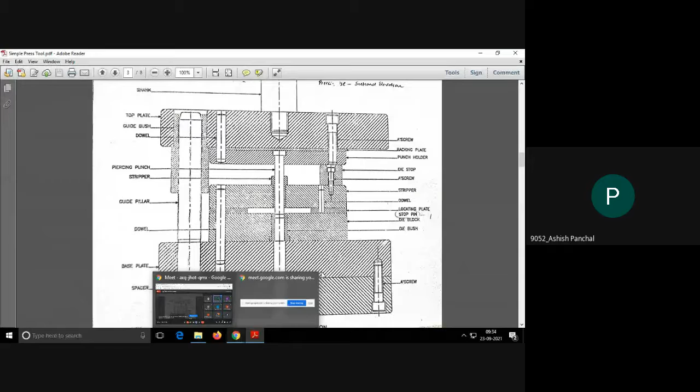And for any guide pillar and guide bush, for die block, what should be the thickness? Die block you take 25 mm thickness.

Stripper you take 15 mm. Punch holder you can take 15 mm. This is just a rough guideline, okay? It's not hard and fast. And for the punch backing plate, 5 mm.

Then coming to the bushes, how to design the bushes? You have to take minimum 3 mm and maximum 5 mm, not more than 5 mm, not less than 3 mm. Because if the thickness of this bush is less than 3 mm, then it can collapse while fitting as well as during working. So minimum 3 mm wall thickness has to be there.

So for example, if piercing punch diameter is 10, then the diameter of the guide bush will be 16 minimum and maximum 20. Similarly, collar also you can take 3 mm to 5 mm. So if this is 10, this diameter maximum will be 20 and this diameter maximum will be 30.

Then collar height thickness, you can have your own judgment, you can take 5 mm. Here the collar height, this bush height should be at least 25 to 30 mm, because here it is going to be guided over a long distance. So you can take this as 30 mm.

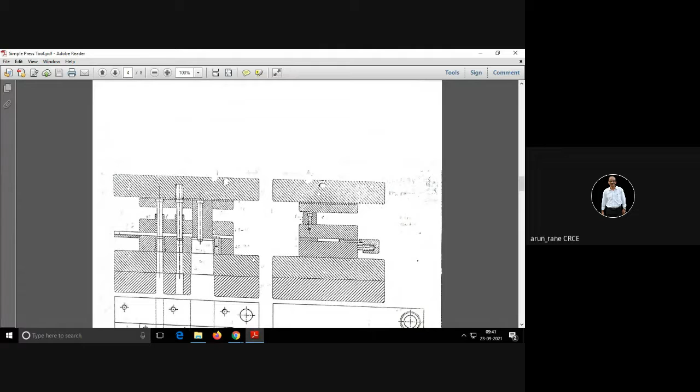Then another consideration here is this die stopper. This is what we call a die stopper. This is used just to prevent the falling of the upper half. Suppose if it comes out from the shank, if it falls down and this die stop is not there, then the punch holder will go and hit here and your punch holder plate will get damaged. That's why we provide a die stop.

Now look, die stop is fixed to the stripper plate. See the bolting, this die stop is fixed to the stripper plate. Die stops are round, circular. See here, these are the die stops, the two shown here.

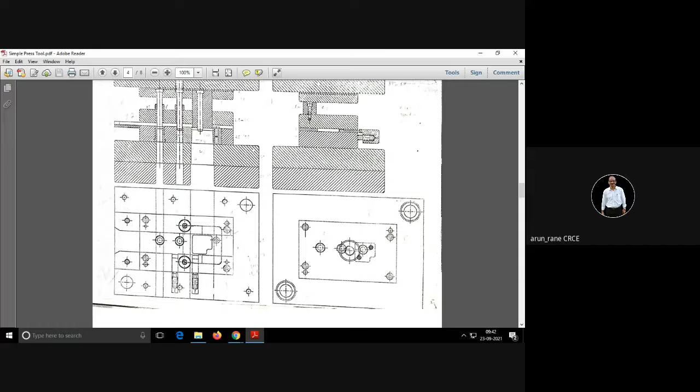So preferably the die stop should be at the center of the die, somewhere here, not over here, not at the end. So it should be preferably at the center or somewhere closer to the center. So look here, the die stop is fixed to the stripper plate. In case the upper half falls down, it will go and touch the die stop, so the damage will not happen.

For the die stop size, you can go for a round die stop, 25 dia. This die stop's diameter you can take as 25mm, and the height of the die stop can also be taken as 20mm. So that's the die stop. So I have told you die stop, shank, top plate, guide pillar, guide bush, dowel, everything - these are the basic parts.

Now either you can use a spacer, that is a parallel block here, or you can use a plate of the base plate size, with thickness 25mm. If you are using a spacer, then you need to use two spacers. Why are spacers used? Just to save on material. Suppose if this is 300 by 250, then the spacer need not go for 300, you can use a spacer of say 100mm by 250, two numbers.

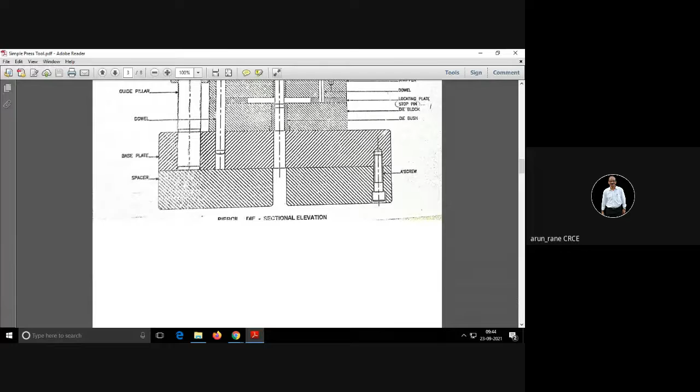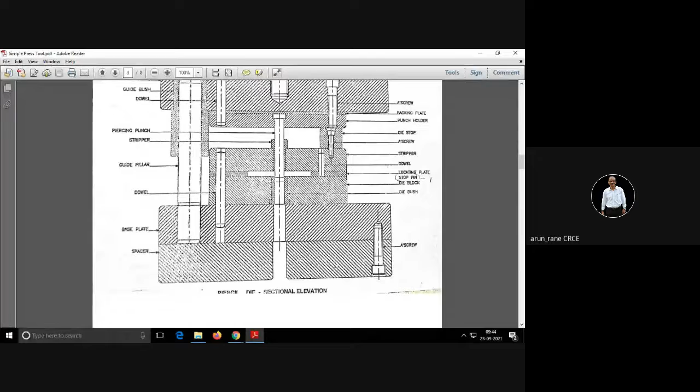But if you are using a single plate, then alignment issues will not occur. What happens with a spacer? If suppose the thickness of the spacer is not the same, even a slight difference of 0.1, then your whole tool will become crooked. Suppose the thickness of the two spacers or parallel blocks differs by 0.1, then the entire tool will become cross.

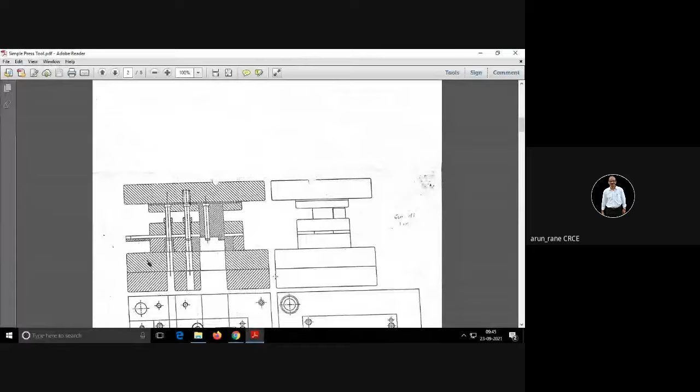So it is better that you go for a single plate. So before you proceed, you check this, study this tool, and then you can proceed. You will need some 1 or 2 iterations, you cannot directly draw it on the sheet.

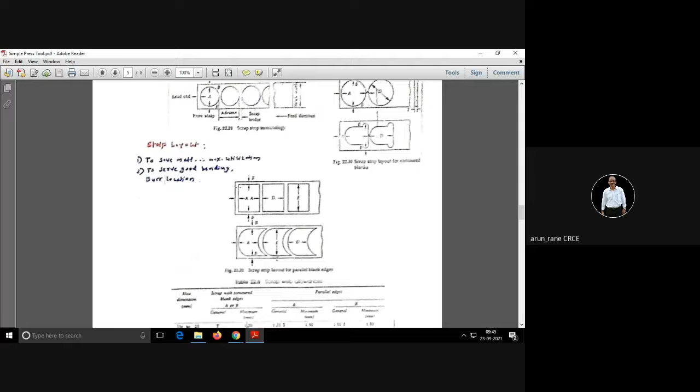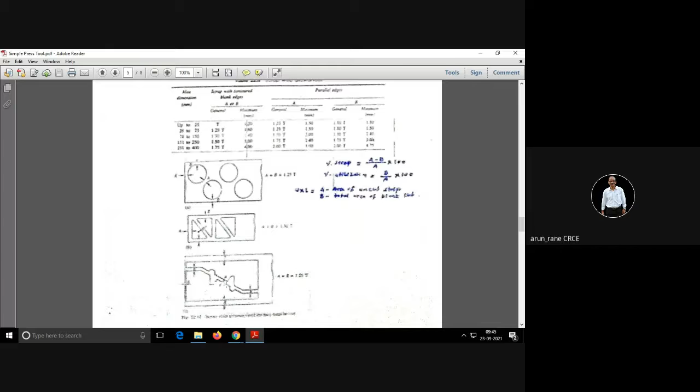Then other things I have covered, so this will help you for the strip layout, how to do the strip layout. This is again one of the components, this is for the circle. Yesterday Joel was telling that in case of a circle, the percentage utilization will be less. But if you have a layout like this, then probably your percentage utilization can be increased, improved. This is what I was telling. Now here, what is happening here?

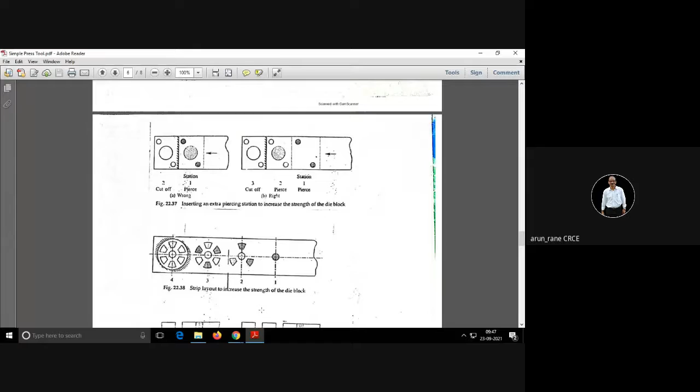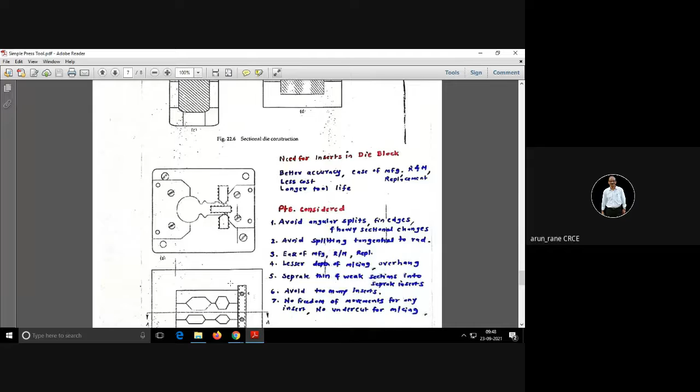Similarly, this is again a strip layout for making a circlip. And this is the concept that instead of going for a single piece, single plate, you try to go for the inserts. Try to go for the inserts. Like I told you, for the punch which is working, you use the bushes. Don't directly pass the punch in the plates itself, in the die block. So in the die block, you fix up a bush, and in that bush the punch will go up and down. Similarly, that punch is also going to be fixed in the punch holder plate with the help of a bush. So try to use the bushes or the inserts wherever there is relative movement.

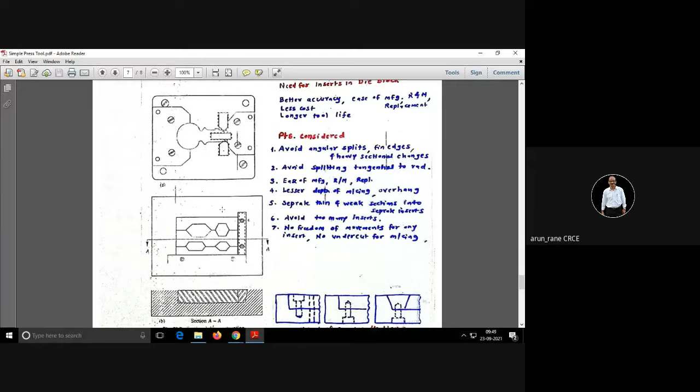So now this was a key. So now the inserts will also help you from the machining point of view. It will be easier to machine. These are the ways to fix the inserts, and these are the standard die sets.

So this also I have explained to you, and these are the stops. These are the stops because you have to initially locate the strip. The strip has to stop at some point, so for that you are using these end stops.

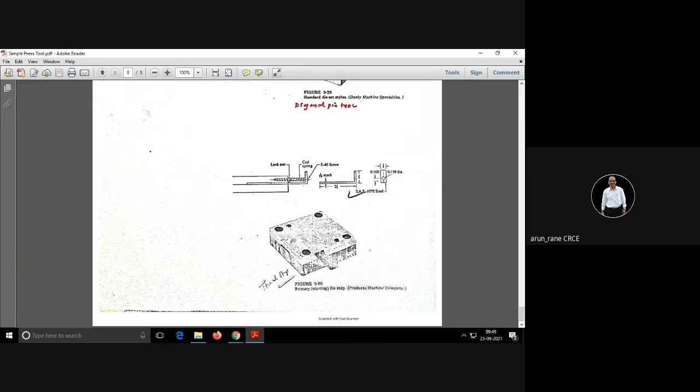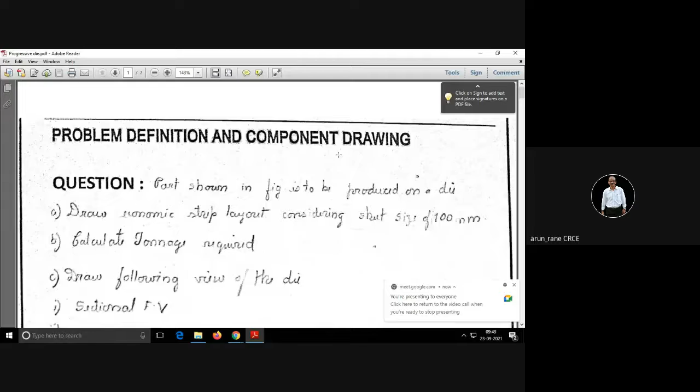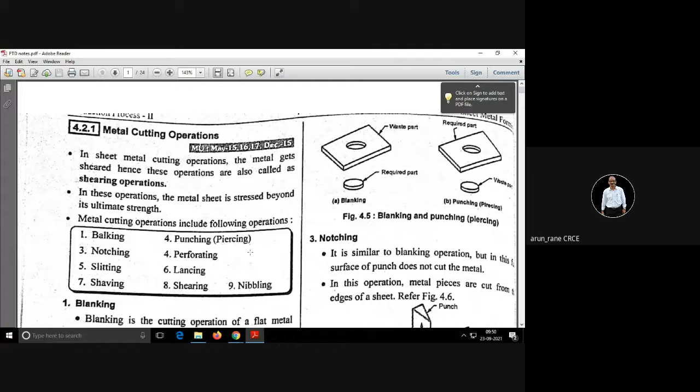So this is also done. Now I had skipped some part, and to keep you engaged, since we had almost done with the process estimations, process time estimation, I had started with the progressive die design. I feel I have taught you enough so that you can start with your progressive die, and definitely in the practical we'll be discussing. So I had missed some parts, like what are the different operations. Before we go for bending and before we go for drawing, I would like to touch upon some important points.

Can anybody tell me what is the difference between slitting and lancing?

Slitting, this is I am telling you from my teaching experience, not from the notes. So if you want, you can write it or refer to the recorded lecture. Slitting is nothing but cutting, and in that the scrap will be generated. So you can write: in slitting, scrap is generated.

Whereas in lancing, on the other side, scrap is not generated. So this is what your slitting is, and this is your lancing. So in lancing, there is a cutting operation from three sides and a bending operation from one side, whereas in slitting there is a cutting operation from all the sides.

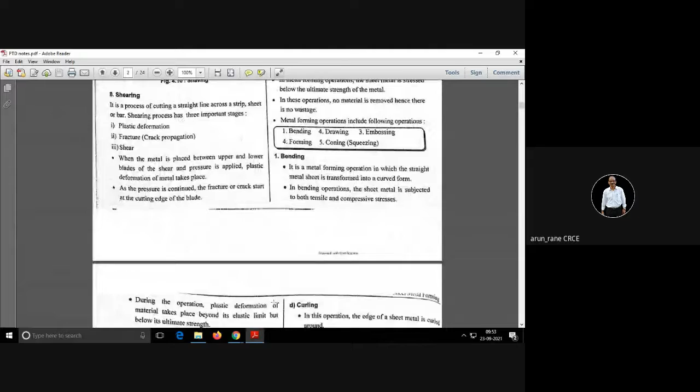Then coining and embossing. So coining and embossing, these are actually not cutting operations. Coining and embossing, they are forming operations. Let me see, I have the sketches. So this is a sketch of embossing, and this is the sketch of coining.

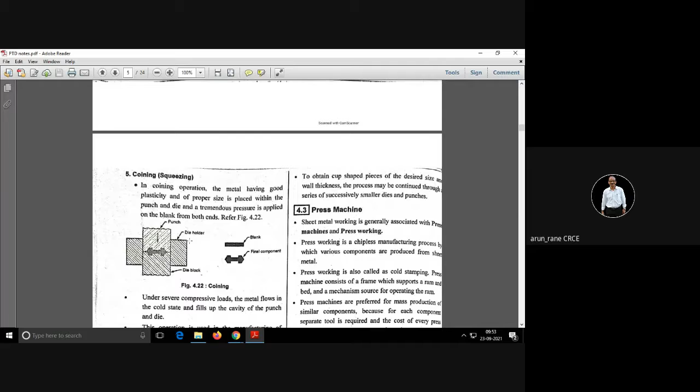So what happens? In coining, you can have two different designs on both sides of the workpiece. It is like casting or molding, whereas in embossing you cannot. In embossing, we press the material down, and the material bulges out on one side. Whereas in coining, you can have two different designs like head and tail. So in coining there will be two different designs, and in embossing there will be only one design.

Because in embossing, one side is depressed and the other side is raised, like your belt, waist belt. Whereas in coining, the different design is created on both the sides.

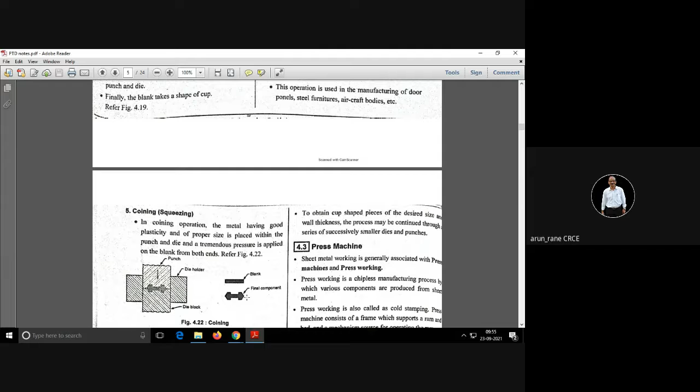In coining there will be a change in the thickness of the strip, whereas in embossing there will not be a change in the thickness of the strip.

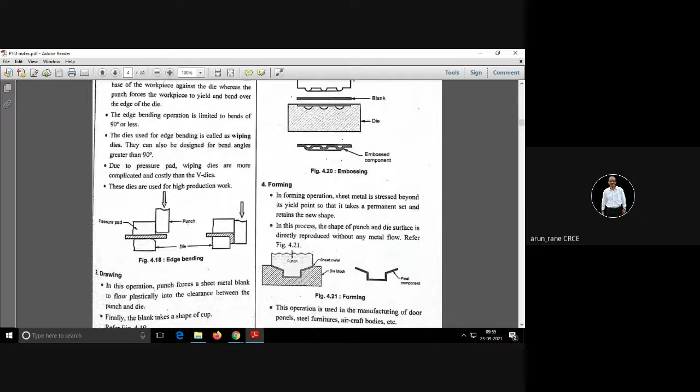If your strip is 2mm, it stays 2mm in embossing, only it bulges. Whereas in coining, you will get a variation in the thickness - the blank's thickness and the final component's thickness will be different.

I hope you are understanding. If not, please stop me. I am only giving you 2 or 3 points out of my teaching experience. Blanking and punching - this difference is most commonly asked.

So in blanking, the punched out piece is useful and the remaining is scrap. In punching, the punched out piece is scrap and the remaining is useful.

Then in blanking, the clearance is provided on the punch and the cavity is of the size of the blank. If I want a blank diameter of 25, then my die block's cavity will be 25, and the punch will be undersize, say 24.8, depending upon the clearance.

And it's the opposite in case of punching - the punch is of the same size as the hole to be pierced, and in blanking, the cavity is of the same size as the component diameter.

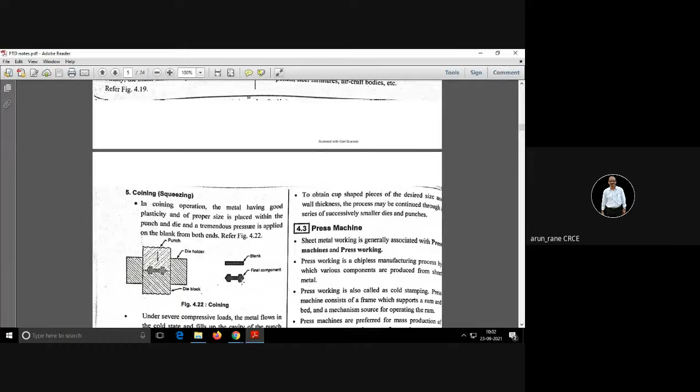Then bending and drawing we'll see later. Okay, now we'll quickly flip through this - these notes I have already uploaded.

Because with the help of this, you will be able to write for the examination. So this is blanking.

Kya ho raha hai? Neeche ka part jo falling down hai due to gravity, that is what we are going to use. So that is what is blanking.

Punching - this is the part which is going to be used, and ye jo hai this is the scrap. In blanking, this is the scrap, top one, bottom one is used.

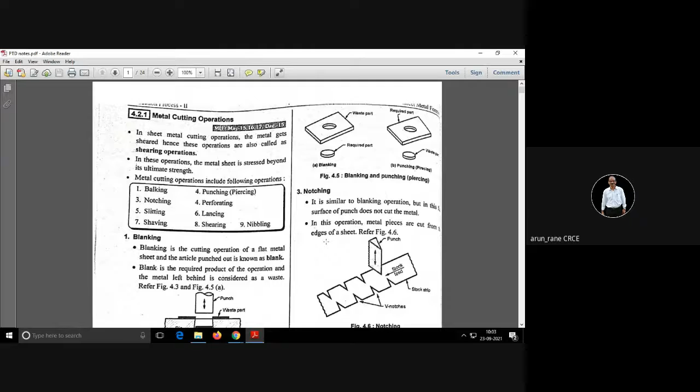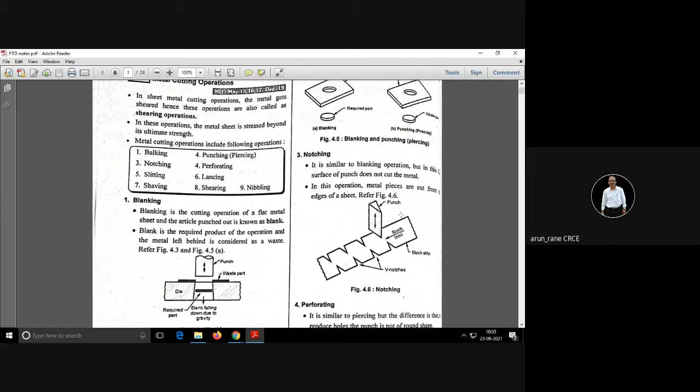Notching is also like a piercing, but usually notching is always at the edges. So we call it a notch, we don't call it a piercing. It is always at the edges.

This is perforating. It can be square holes or round holes, number of holes. Not necessarily that it's square or round, it can be triangular, but small triangles which are pierced. That is what is called perforating.

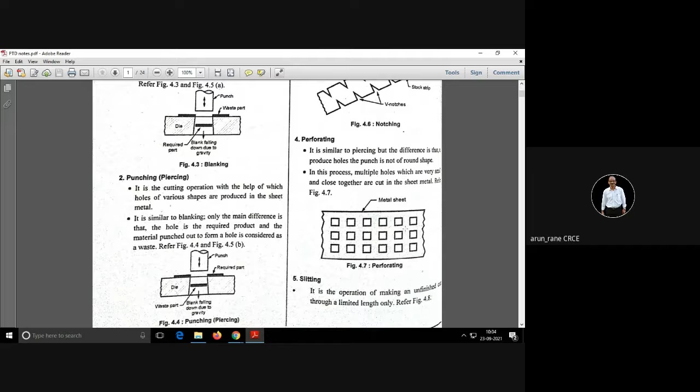Slitting, as I told you, you will get a cut here, and lancing, there will not be any scrap. Teen side se cutting hoga aur ek side se bend hoga. So you can notice in this sketch that this clearance is more.

This is the die block in which this we call as a cavity, and this is a punch which is descending down. So now this clearance you can note that it is equal to the thickness of the component.

Then shaving and trimming is the same. So in shaving and trimming, very small amount of material is removed.

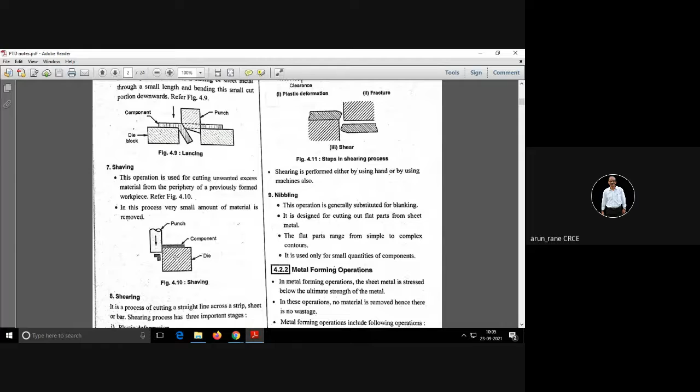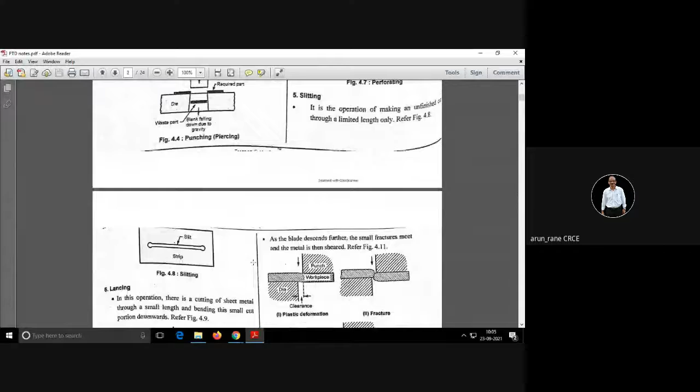Shearing is nothing but cutting basically. And as I told how the shearing operation takes place, you have a punch. Remember here the clearance is not more, it looks like it is more, but it is zoomed up just to show how the shear or how the cutting happens. Okay, so the cutting happens.

First is plastic deformation. Workpiece is plastically deformed. Then the fracture starts from the punch part and from the die part, and the fracture meets, and then only this piece will fall down. If this fracture doesn't meet, like suppose yaha pe aapka 30 degree hai aur yaha pe aapka 45 degree hai, if these are not meeting, then cutting will not happen, shear will not happen.

It is like if you are drilling from both sides like a tunnel, and if they are out, then it will not meet. Or if you are doing a long drilling, say aapko 1000 mm drill karna hai, so 500 mm from side A and 500 mm from the other side. If they are not matching properly, you will not get a 1 meter ka hole. So same thing here, both the angles should be correct.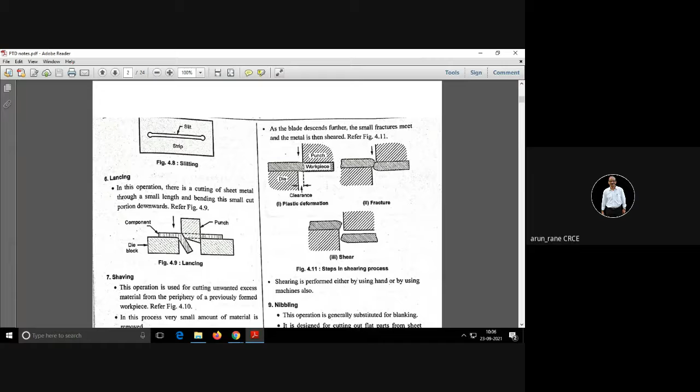Nibbling means what? Like suppose if I want to do a punching of a bigger hole, say I want to do a punching of 200 dia. My piercing hole size is 200 dia. So in that case, I need to have a punch of diameter 200. So what we do in order to save on the material cost and manufacturing cost, we use a smaller punch, 10 dia.

And then we will do the punching across the hole. So we'll take a series of strokes - tap, tap, tap, tap, tap. That is what is called nibbling across the hole. So we are going to use a small punch which is readily available.

So the disadvantage of this is what? It is going to take a longer time. And advantage kya? You don't have to go for a diameter 200 punch. And it's not necessary that you can only do round holes, you can even do square also. Only that it will take a lot of time.

That is one. And second thing is, this nibbling has to be performed on a CNC punch press, where there is a provision of moving axis X and Y. Remember, nibbling is like your milling machine, only in milling machine the end mill is rotating, X and Y axis are moving. In nibbling, the punch is moving up and down, it's not rotating, and there is a movement for X and Y axis.

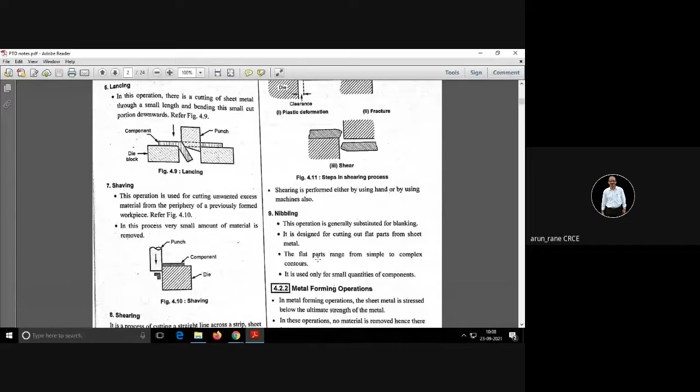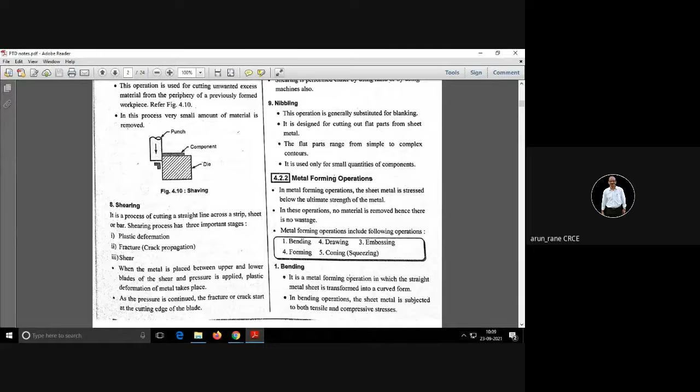And now what about forming operation? Here the cutting doesn't happen. So remember, in forming, the clearance will be more. So what are the various forming operations? Bending, drawing, embossing, forming itself - forming is a type of forming operation. Coining.

So in case of cutting, jo sheet metal hai or the strip hai, it is stressed above the ultimate strength of the material. Whereas in metal forming, the sheet metal is stressed below the ultimate strength, and there is no cutting, there is no material removal. In metal forming, remember, bending, drawing - metal is not removed, material is not removed. So there is no wastage.

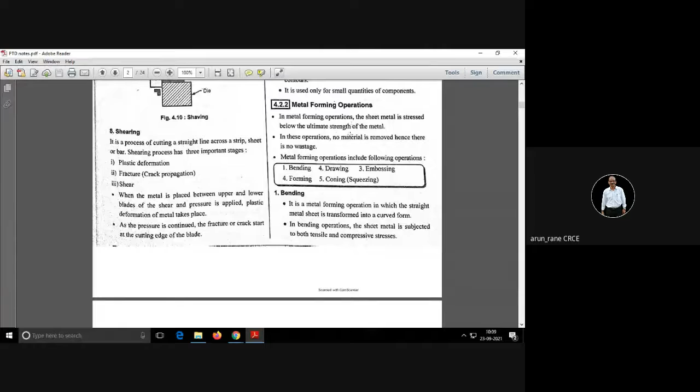And these are the various metal forming operations, like U bending. Is there any cutting? No. Is there any wastage? No.